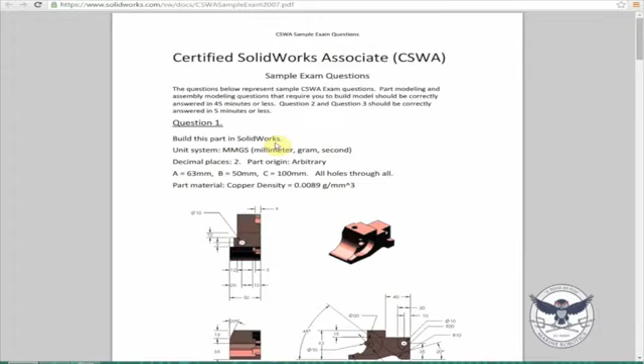So there's a bunch of example questions online you can find. These are directly from SolidWorks on the exam. Some of them are older, some of them are newer. It's basically the same thing as the easier ones - they're just more complicated parts and going to take longer to do things.

So I'm going to start out with something simple like this. It's just a basic - I don't even know what this is. It looks like a cam for like a linear bearing maybe.

The big thing to notice with this is first they give you these dimensions: A equals 50, B equals 70. And there's a huge part to this to make sure you pass the test.

So the first thing I would do is go into Tools, and there's this thing called Equations. This is very important in SolidWorks. You can set up global variables. Any sketch that you make has a value.

It'll save in here. You have to change the view, but it'll list under dimensions here. So you can make variables as equations.

So now if you wanted like A over 10, you could set this variable equal to A divided by 10, and that's equal to 1. So anytime I change 10 to 20, this will update as well. So it's a useful thing in SolidWorks.

So first thing I'm going to do is set B equal to whatever it was. What was it? 70 and 50.

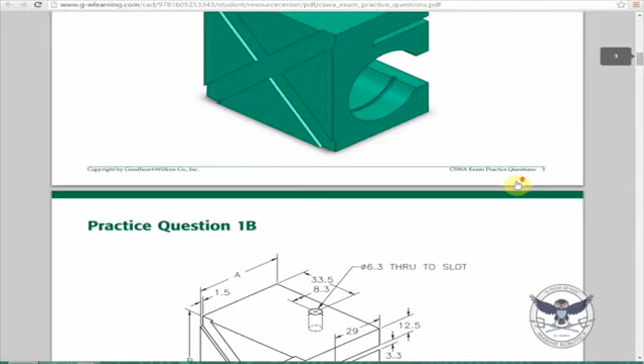Another thing with SolidWorks is you want to be strategic with your models. You have to have a good idea of what you're going to draw before you just go and draw it. Often I see people start with like this face, or somewhere that wasn't methodically thought out from the beginning. What I would do is start on this face and extrude this whole piece outward like this. So that's what we're going to do.

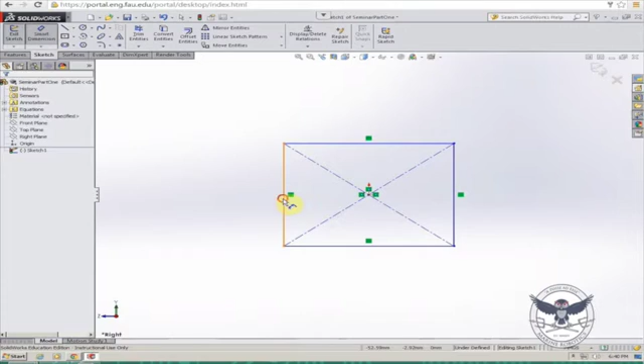So the dimensions of this is A and B. Here it doesn't matter which plane you do. Also, I like to use the center point like this, it's just a personal preference. So if you click the rectangle box, you can get that option to get the center thing. So now this dimension is A, so I can say equal to A, and there's A. You get this little equation looking thing, sum, and then this is B.

So now if I go up here and I change A to 20, that'll change automatically.

So this is 67 millimeters total. So I'm going to extrude this. Again, I like to do mid-plane so it evenly spreads the whole thing across it. So this is 67 millimeters. Now the reason I can also set this equal to A, or I could say A times 2, see how you get the little equation thing? But they didn't give me a dimension as a variable here, so I'm just going to say 67.

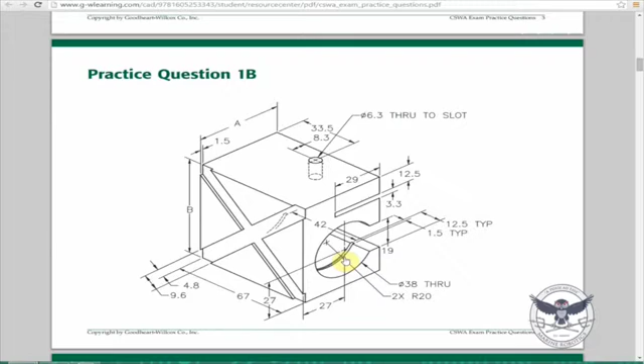Okay, so what's the diameter of this circle? 38? Right? Yeah, okay. And then it's 27 and 27 millimeters from one corner. It almost looks like it's in the center, but it's not.

So a nice quick key is Control 8. When you start a sketch and you do Control 8, it'll automatically go normal to it. A lot of professors will teach you to right click and do this, but in my opinion it's a little slow.

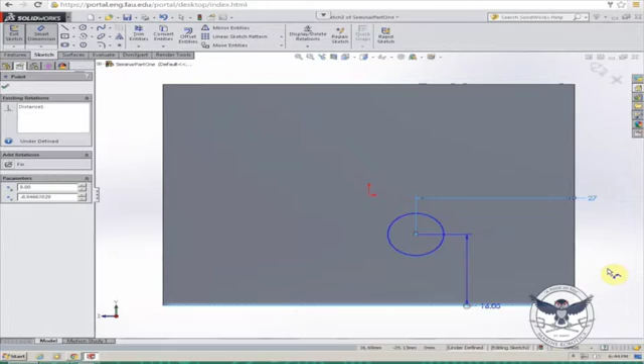Alright, so circle, 27 millimeters. It's 38, right? Yep.

So now we can just extrude cut that through the whole thing. So now we have a break through this whole thing that's 19 in total.

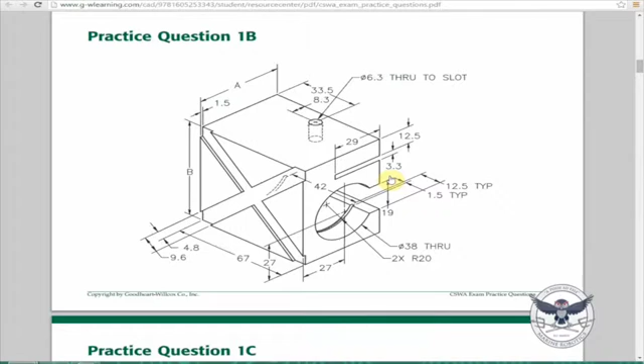So on your model, it looks like on the inside of that cut, is the whole thing already like how it's all shiny and beautiful? Yeah, how do you get that to happen? So that's just by default this little RealView graphics, I think. I don't really like it personally, it just takes up more GPU power to render it, basically on the virtual machine. Once we finish it, we can go and render it, make it look really nice. But for now, it's not that useful in my opinion.

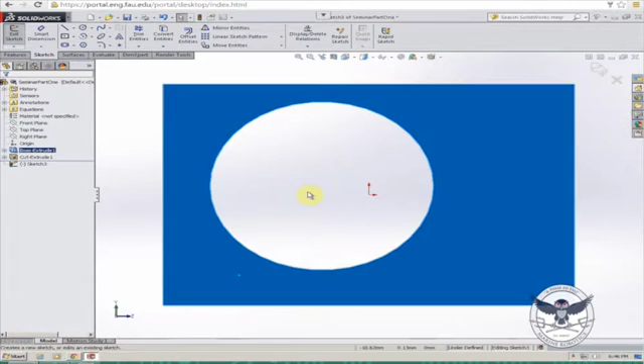So now I'm going to cut out this piece here. It's directly in the center of this piece, so we can just draw a rectangle. Actually, I want a different rectangle. This is 19 millimeters.

Does everyone understand the concept of the fully defined sketch? Yeah? You want to go over it? Okay, so a fully defined sketch means that it's all black, basically. You can also see down here it says fully defined. And what they mean by that is everything in the sketch is stuck to something in relation to. So SolidWorks is a parametric program, meaning it has parameters for everything. So what I can do is relate this point to this line in these different ways. So I can say I want this to be at the midpoint of this line, or I can just say coincident. And Pierce is a little different, that's more like 3D view, but it would do the same thing as coincident here.

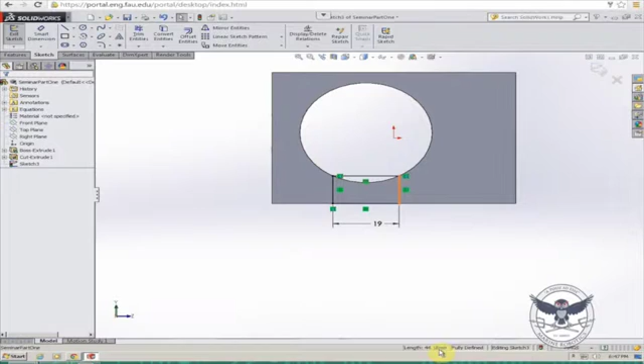So basically you just want your whole sketch to be black like this and say fully defined at the end. And you want to make sure you relate it to things that are important in the sketch later, because if you move or if you change the size of the circle later, you want this thing to change with it. This is the point of that.

So what I did is I made these, this is a square, so by making these coincident with the circle here, it centers it on this circle as it should. So if I move this circle up or down or left or right, this extrusion will come with it. So I'll extrude cut that and through all.

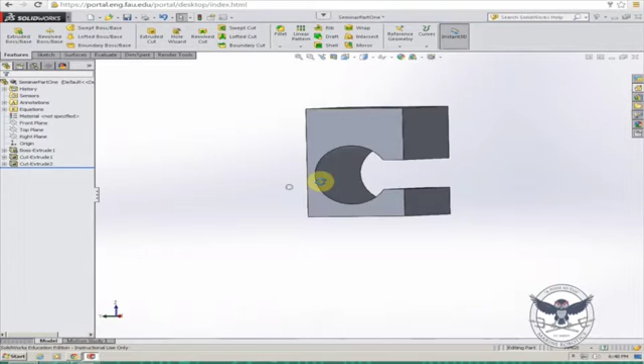Alright, what's next? So let's cut this piece here. Do you think you want to put that extrude cut on the correct side of the part? Is that not on the right side of the part? It's not. No, it should be on the thin side, because that's the side that was dimensioned to 27, and it's on the opposite side of that. Let's check that.

Oh yeah, okay, so check this out. So Harold brought up a good point. But since this is parametric, I don't have to delete everything, you just change the relations. So now instead this is 27.

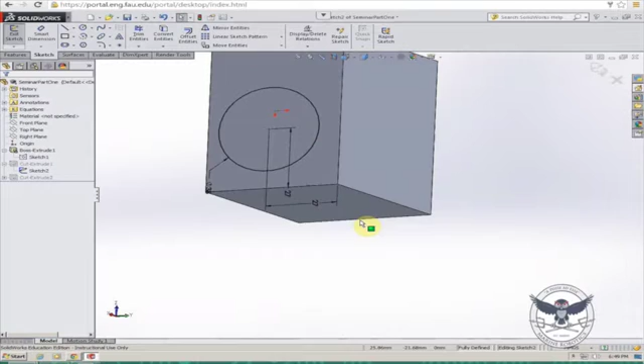Exit the sketch and everything will go with it. So you can see here this rectangle is still coincident with the circle.

Alright, so now we're going to do this piece, which is 3.3 by 29.

I think it was 12.5 away. Yep. And then you can see here it goes all the way through the model. That's what they call a hidden line, so you can't really see it from this view, but you can see that there's something behind there.

Also, when you're in a sketch and you're done with it, it's all fully defined. You don't actually have to exit the sketch. You can just go over to the Features tab, press Extrude Cut, and it knows what you want to extrude cut now because you were currently in the sketch.

And we want to go through all again. Also, you have these options for extrusion. You can go through all. Through all both means it goes in both directions, not just one. You can go to next, which is the same thing we're doing here—it will just go until it comes to something new.

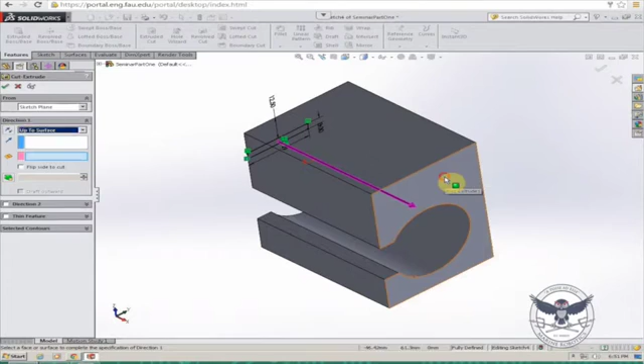We have up to surface, which would allow you to extrude up to a certain surface. And if you had a 3D surface, you could have it curve around that surface. Up to body is the same thing as surface, but a body. But we're just going to do through all.

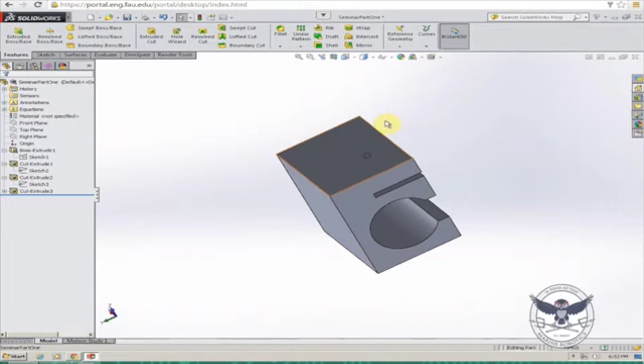So next I think I want to do this hole here, and this is 6.3 in diameter. So we make a sketch on the top. I like to just draw it somewhere, nowhere really specific, just kind of out of the way, and use my dimensions to define it to a certain point.

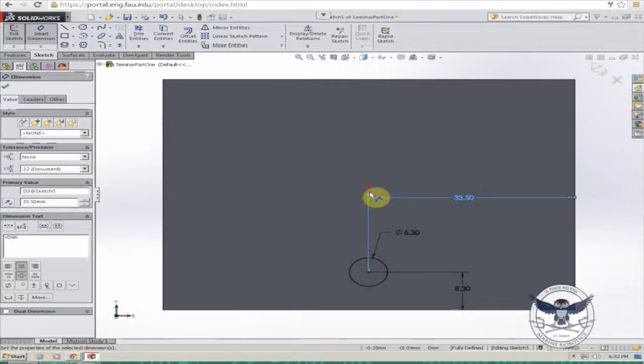Now that looks like it's in the center as well. In any other case, I might say that that was the center, but since this is the SolidWorks exam, I would just use the dimensions that they give you and not try to recreate and do it a better way.

So now that's fully defined, we can extrude cut that. And here we can use our up to surface. You can also use up to next—yeah, I think I like that better actually. It should just go to the next surface.

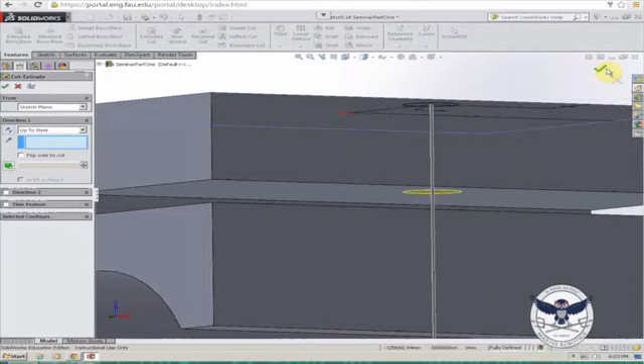So now we're almost done. We just have these internal gasket-looking things, and then this retention ring slots, these slots on the outside.

So let's do the slots on the outside first. I'm going to make a sketch on the outside, just going to draw a bunch of stuff here that generally looks like what I'm going for.

Alright, now we know these here are parallel, so we can select those two and set a parallel relation. We'll do that for all of them. Whoops, not equal. And then these here are collinear.

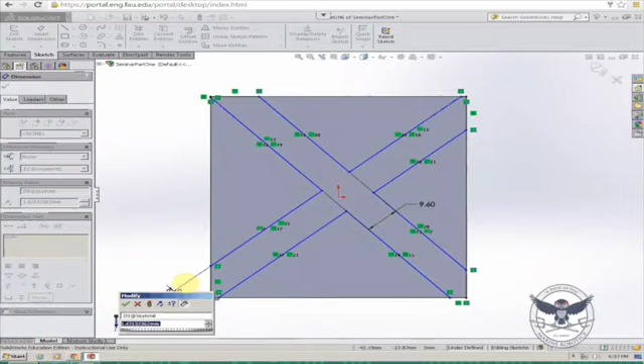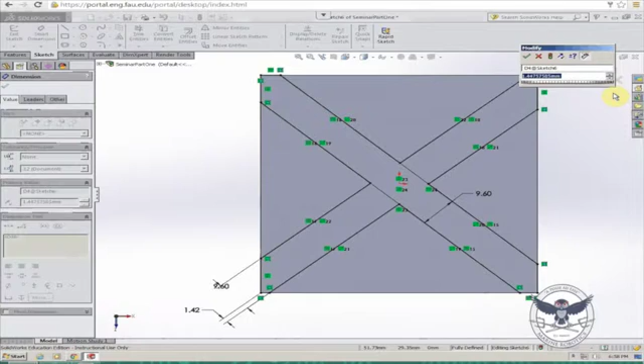You know what? I got a better idea. Why not just make an X and then offset it? Yeah, that's what I was thinking.

Would you just do that for construction? Okay, so any of these lines, you can just set for construction, and now it's a construction line. So when you extrude it or do any features with it, it'll ignore it—it's just for construction. But you can apply relations and stuff to it at the same time.

Can I do, yeah, okay, bidirectional. So I did an offset here of 4.8, which I think is right. Yeah, 4.8. And then I set bidirectional, so it's going in both directions.

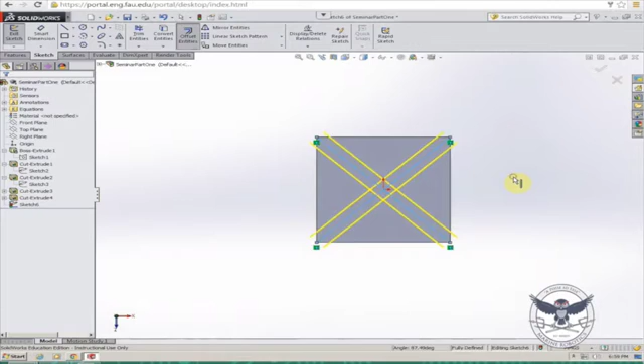What I'll do is go to convert entities, and that'll take all the lines on that face and make it a line on your sketch. So now I can use that to trim these away.

If I get the trim tool - there's a bunch of different ways of using it. You have power trim, which is what I usually use. The rest of them, I doubt you'll find a reason to use, but they could be faster in some situations.

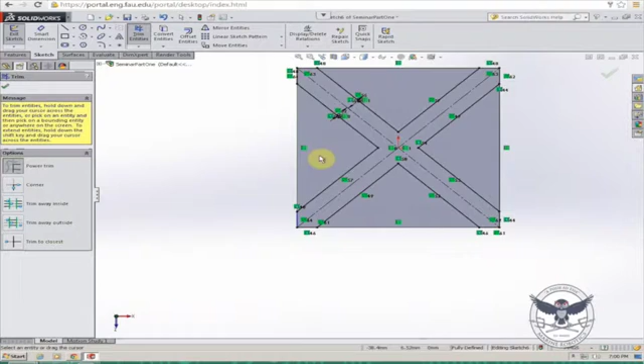So with trim, you just hover over it and draw a line over it. SolidWorks will do its best to figure out how to redo the relations. Sometimes you have to re-relate things, but here I don't think I have to. There we go.

So now we're going to extrude this 1.5 millimeters in. That's that shape.

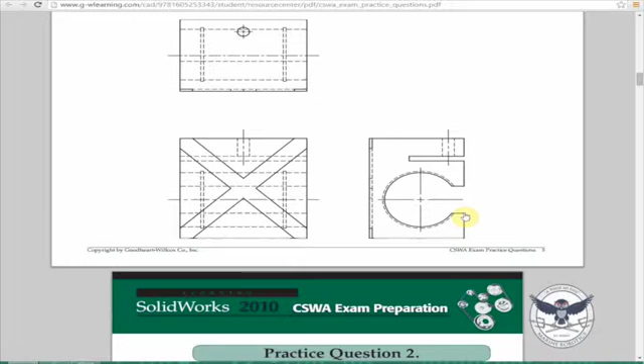Let me see, maybe I'm going to make an axis along here, and then I'm going to make a plane. You already did that - how do you do that? Do the axis? Yeah, so...

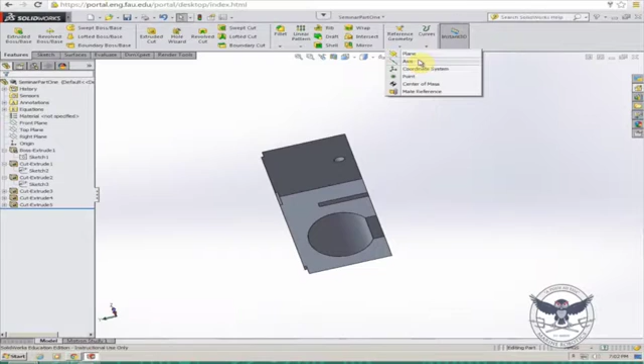Under reference geometry, you have a bunch of things. I usually use plane and axis, but if you go to axes, you can make an axis along a bunch of different things. So say you wanted an axis across here, you would select these two points and it would make a line like that. But since we selected this surface here, it knew where it wanted it - it was like a radius or diameter, I don't know how it does it, but see, it selected cylindrical conical face.

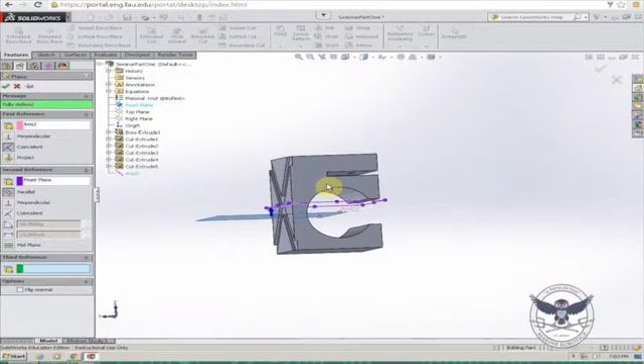And now we can use this axis to make a plane. So you select the plane in here. We don't have to do much else, but I'm going to define it - oops. Yeah, see, I want it parallel to this face, so I selected the axes and I wanted it coincident with that axis, so it's touching the axes. And then I want it to be parallel with the front plane. So now I have a plane intersecting that circle.

Now I can use this to make a sketch on, but first I'm going to do a section view - not on the front plane, but on this plane. That way I can see what I'm doing. I'm going to make a sketch on it.

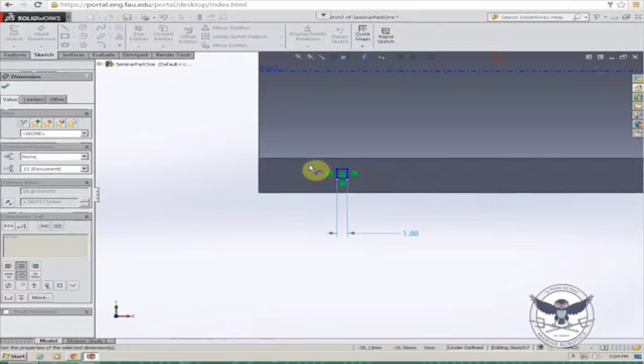I'm going to draw a little rectangle here, and it is 1.5 millimeters. And from this center axis, it was 20 millimeters, which was the depth, right? Yeah. And then it is...

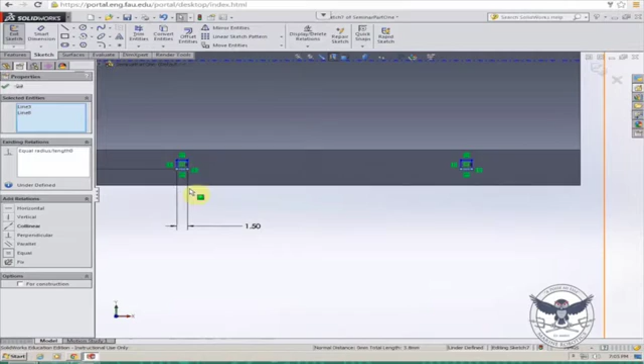I'm going to make another one, and here what I can do is I can set these equal - whoops. Instead of redimensioning this one, I've already dimensioned this and it's the same dimension, so just set it equal. And I want these to be horizontal, and I'll make this coincident as well. Actually, I'm going to make it coincident with this edge.

If you have a relation you don't want, you can just select it - that's what these little green boxes are - and just press delete on your keyboard.

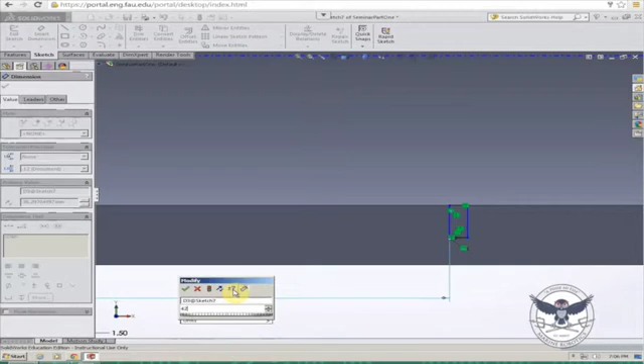And then the dimension between these two is 42 millimeters. I think so, yeah, yeah it is. Let's take a point to it and then - and then it's 12.5 from that same edge to the outside edge. It looks to me like it's in the center. Yeah, but if you're taking a test, I would just use the dimensions they give you.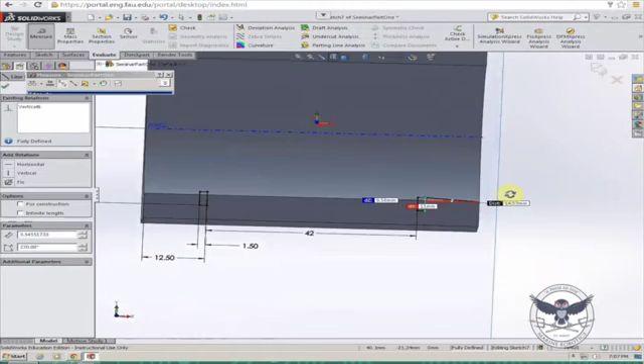And I think if we measured - no, it's not. I don't think it'll affect the answer, but you don't want to get it wrong. Okay, now that we have that, we can exit this sketch.

We'll go into features and we'll do a revolve cut. The axis of revolution is this axis we just made. You can press OK, and it just cut that all the way through. We'll turn off the section view, and that's it.

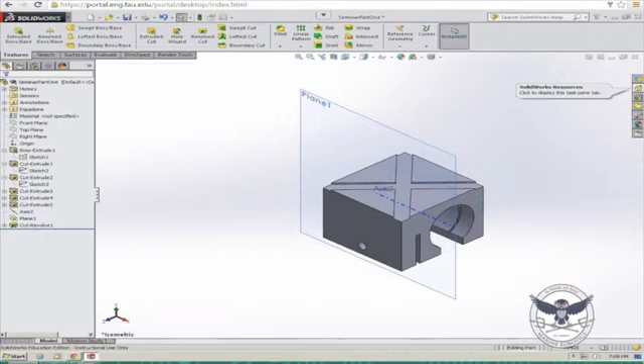So we could also put some materials on here for some colors. I kind of hate the gray that they always do - maybe a blue would be good.

One thing we have to do is set the material, since they told us it's AISI 1020. To set the material of your object, you right click on it in the hierarchy, the top tree piece here, right click, go to material, edit material.

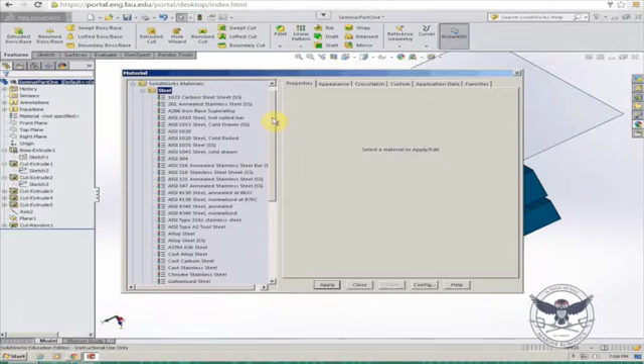And it's this here, so we'll go apply. It actually changed the color on me. I'm going to hide this plane, I don't need it anymore.

That's the whole thing. So now what they're going to ask you is, what is the overall mass of the part in grams? Let's find out. If we go to mass properties, it says 1127. There we go, so the answer is D.

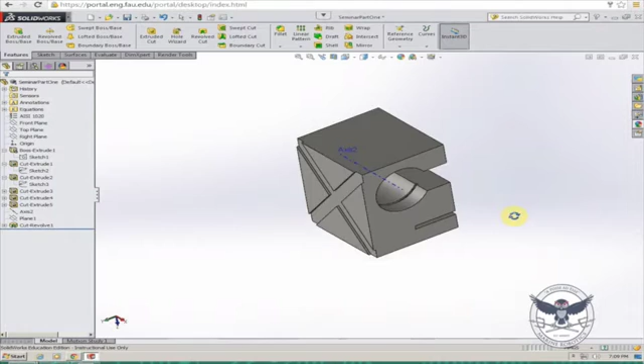We can go back into mass properties and find what the new mass is. That makes question 2 a lot easier - all you have to do is change those dimensions and find the mass. If you didn't do that, you would have had to go back into your sketch, find where you made those dimensions, reset them, and hope that everything else was related correctly.

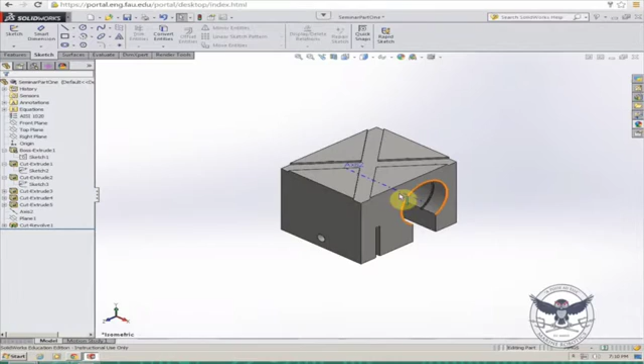Oh yeah, beautiful, okay. Can you hide the axis? We'll be here for a while. Yeah, let me hide the axis. Now it looks perfect, so the render, thank you.

So the rendering tools aren't enabled by default here, so we have to go into the add-ins, tools, scroll down to the bottom, add-ins, and here we want to set PhotoView 360 to active. Since I'm on the server here on the VMware, if I set startup it won't save by default. But if this was on your computer and you wanted PhotoView 360 to come up every time you open SolidWorks, you would check that box.

So now we can add a background. Let's do this urban thing. And do a preview window.

Always takes forever. What was the last, was it preview window, what was it? Oh, it's on, you might not have the tab. Right click on one of the, do you have the render tab? Yeah. You don't have preview window there? Oh, yeah, there you go.

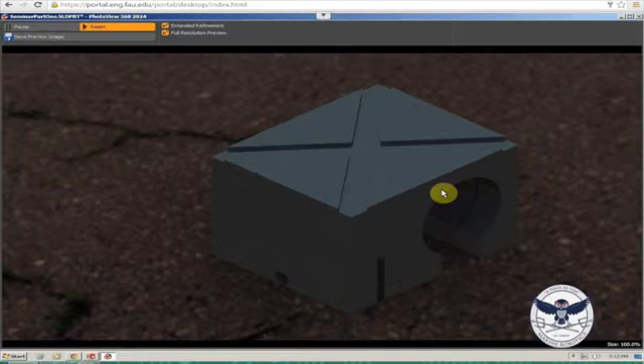Why are you here? I didn't know how to do the equation.

Stuff like... you want to try this one? Yeah, yeah, okay.

What's the website so we can actually open this up as well? Oh, this practice thing? Yeah. So if you just Google, like SolidWorks Certified Associate Practice Exam.

It's like these 3 PDFs. But I can email this to you if you want or something. There's also a bunch of stuff on GrabCAD from people who have done this before, taken the test.

All kinds of tutorials in here. So this is my SolidWorks, my GrabCAD page. We got a little Lego spaceship, yeah.

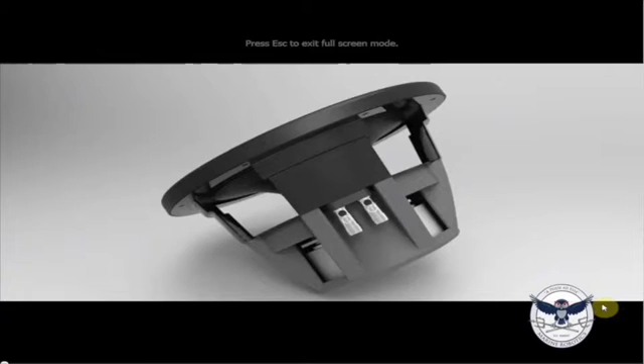And I actually did a full HD rendering. Yeah, how long did that take? It took my computer like 10 hours. I went to work, started it before I left, and by the time I got back it wasn't done, it was still working on it. For that 10 seconds that took like 10 hours, and it's just 10 seconds long too. That's pretty awesome. You got it so smooth on the other end.

Yeah, well that's the material you see. Oh okay, figure that out. What, the rendering? You got the material because it doesn't show like plastic.

Yeah, so I didn't use SolidWorks to render that actually, I used a program called KeyShot, which is way better in my opinion, and it's way easier to use too. It's a lot simpler, and there's a little add-in for SolidWorks where you just press a button and it'll automatically open it in KeyShot. But yeah, all of these images are computer generated. That's not real.

And then I also drew my television, this took a while, a week at home. This is Inventor, Autodesk Inventor.

I highly recommend anyone who's looking to get a job in mechanical stuff to have a GrabCAD and put stuff up there. If you put a link on your resume and they click on it and see stuff like this, it's really beneficial. And then they've got this whole badge thing too - I got this active uploader badge, but there's many other badges, like if you win a challenge, they have challenges on here too.

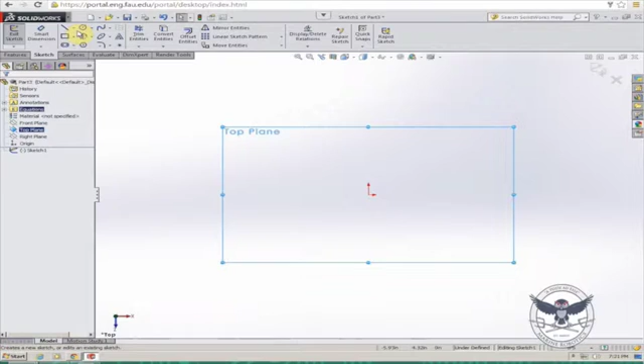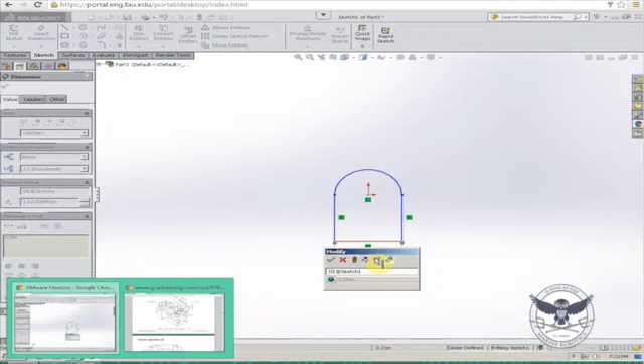So this time I'm going to do it on the top plane, and just draw a rectangle in here, and then I'm going to do a circle or an arc, and relate these points together. I'm going to delete this top line because I don't need it, and make this center point the origin. This was B I think, yeah. And this was equal to A. And that's not good - just make that one equal to B divided by 2.

What's not? You just made a tangent though. That way - oh yeah, I could have done that too. Let's do that actually.

And that gets extruded by... I can't tell, they always make these so hard to read too. It says wall and rib thickness 0.25 at the bottom there - what that means. The other one looks like it's half an inch. I was thinking maybe this, but I think they're talking about this pocket. Yeah it says there's wall and rib - yeah it must be 0.25.

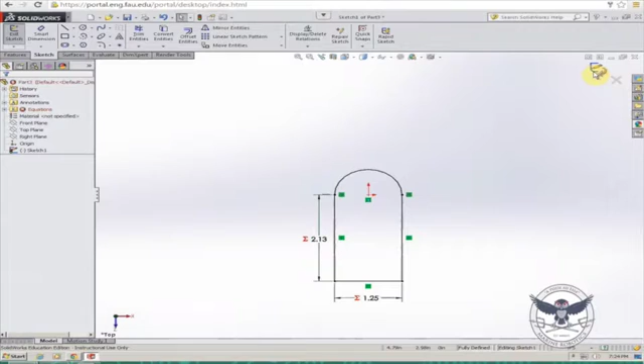It's going to come out lost, bro - you got lost? Yeah, where are you at? I'll still draw a rectangle. Okay, Harold, can you help Wesley? Oh sure, okay, you already asked me. Oh, I got a bad equation.

Did you set A and B? Yeah, the A and B are the same. Okay, so go to the drop down, or... and it's like a good one.

There. Okay, so don't, yeah, drop it. Run.

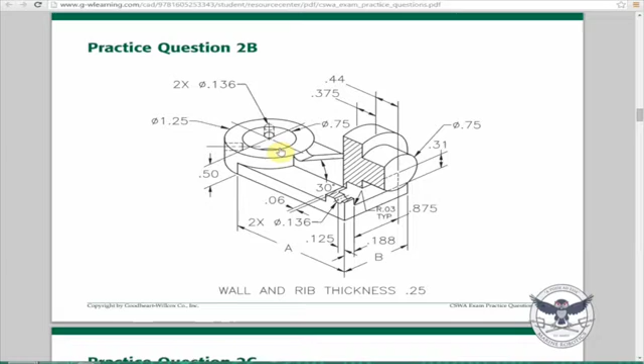So I'm going to draw this circle at the top next. No, draw that, close quicker.

Yep, one. Can you click this one? And yeah, it draws it backwards. Did you click that one? Yeah, I did. Is that what this is? That's what it is.

Do you want to get an actual mouse so you don't have to just click 50 million times?

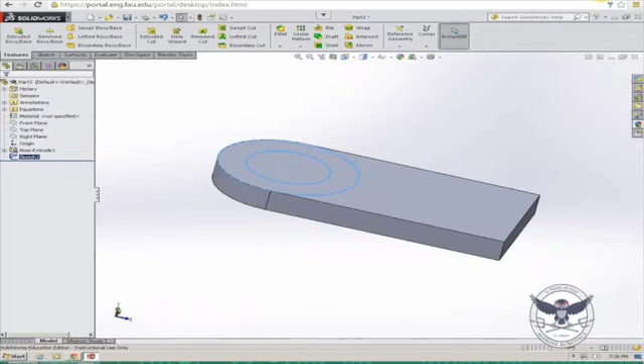Sweet. That's what it— you don't have to. What was the thickness again? 0.25. Oh, there you go.

I'm going to do these little cutouts here. Get a mouse.

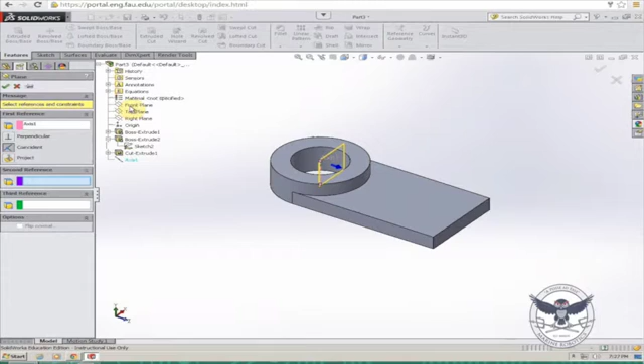And what I think I'll do is make another axis, and I'll use that to make a plane that is at 30 degrees of this.

Well, they make it so you don't use pencils, just don't use them.

Before Harold has a heart attack. This one doesn't work? It works. Okay, use that one. Where's the receiver? It's in there. Oh, so it's right here. It's inside of it. It's hidden.

Out of curiosity, how long did it take you to get to this level of mastery? It's just... so I actually did an Associates of Science in Computer Aided Drafting and Design back in Tampa, which was all AutoCAD. There was a class in Inventor, but that's it. It was like 2, probably 3 years of messing around and interest in this. In high school, I got interested in Photoshop and Illustrator, and then I found out there were 3D programs that were way better, you know, third dimension. So I started playing with those, which got me into CAD, and I've always just been doing that. Yeah, it's about 3 years probably.

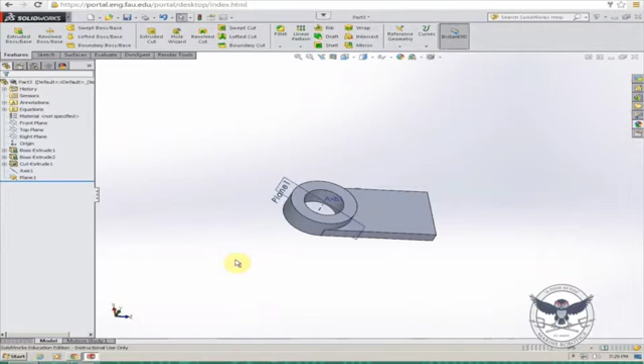Shift, click origin, in SolidWorks. Extrude that 0.25.

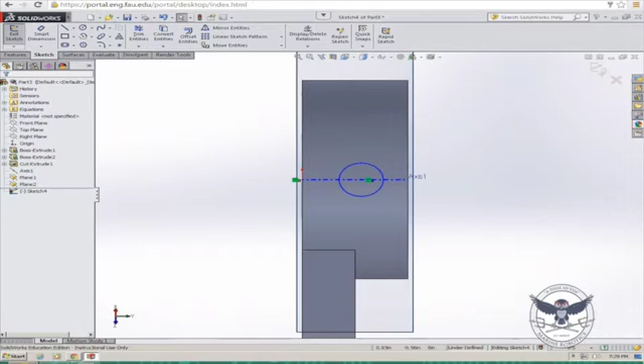Nope, oh it's not. Yes, this right here, that, and that, one. Both of these. And the same thing. Look, it's the last one.

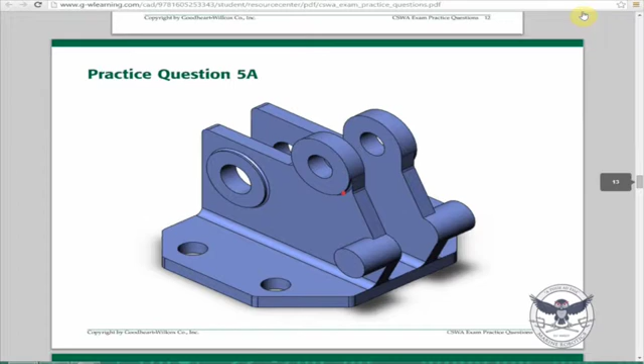How much time do they give you for each question on the test? Or how much— okay, do they give you one question, one time? So it's 3 hours in total. I don't know exactly how many questions there are, but I think there's like 3, just like what we did here. And that's for the associate? Yeah, it's for the associate. And it covers all this stuff, you know, sketching. I think they get into a little bit of assemblies or mates. Or I don't think so actually. That's the professional one, then you've got to cover all this stuff—collision detection and assemblies. And then you get expert, and it goes on.

When you mentioned finding the plane, how did you do that again? How I did the what? The plane, for the last one I just did. How you did the plane, so it won't be part of any of the existing ones. Wait, what? How do you define the plane?

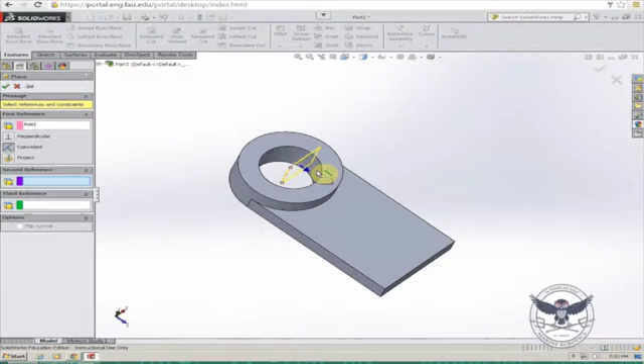Okay, so you can define a plane just like everything else. You can go select a plane. So you know how to get to the plane part, right? The reference geometry window, then plane. And you have references, so you reference it. SolidWorks wants to know where you want a plane, so you say the first reference is this thing. I could say it's perpendicular to that, meaning it's on this plane instead of parallel with it, or I could say coincident with it. In this case, I want it coincident. My second reference is the plane that runs straight through here, which is this one, the right plane.

So now I want it to be 45 degrees from this one plane. Here what I'm saying is my first reference is this axis that runs through here, and I want it to be coincident with that, so it's in the same line. You could say perpendicular, but we don't want that. My second reference is the right plane, which is this plane that runs straight through here, and I want it to be 45 degrees off from there. So I could say 90 or wherever, or I could use any of these other ones. In class, I don't know if you remember, our professor was trying to make a plane between two faces, and there's a way easier way to do that.

Hey Paul, which one was the B measure? Was that the B? Yeah?

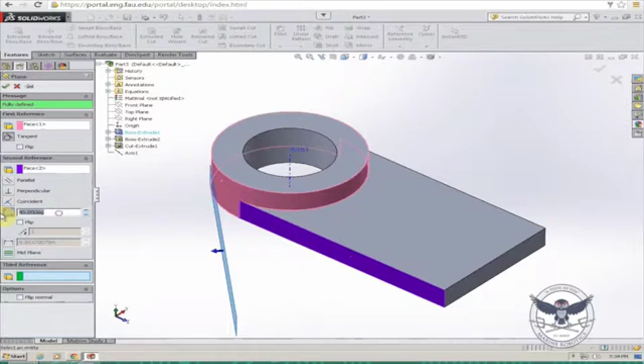We have, if you wanted to do like a tangent to the circle here. Yeah, you can do that. Go plane, and then you need a second reference because it could be anywhere around here. So you can say I want a plane to be tangent to this, but 30 degrees from here. So now it's both tangent with the circle and 30 degrees with the face. And you can get more complicated, but this would give me an error actually. You could give it a third reference too.

And then here I'm offsetting. So I want a plane that's offset 1 inch from this plane.

What's the diameter of that hole? 1.25, I think. No, 0.75. Sorry.

So now I need to cut a little hole in here. And try to use relations as much as possible rather than dimensions.

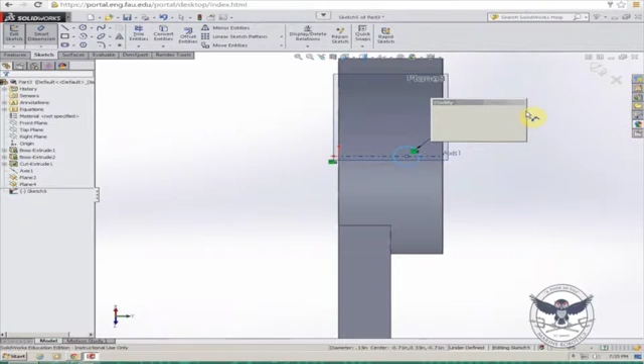What angle is those circles in that base supposed to be? Like your plane was at what angle with respect to the center? It's 45. So 45? Yeah, or from the center, 90 apart from each other. Yeah, that's a good question. Yeah, 45.

And it's 0.19 from the top face here.

Now it's fully defined. I can go extrude cut in the other direction, up to next. Now I'll cut that out.

This is one thing I love about SolidWorks. I can actually mirror this feature I just made. So instead of doing that over again, I can say I want to mirror that feature I just made about this line.

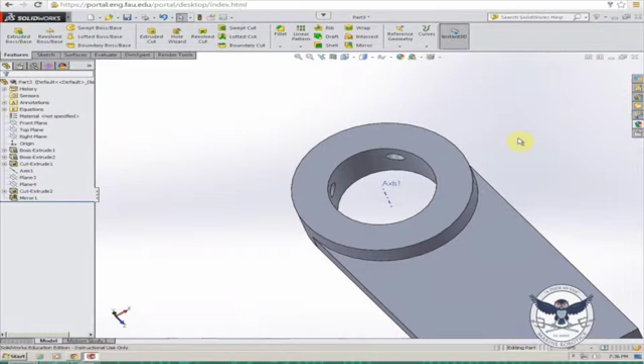Now I got another one. That surface. Now we need...

So to make this the other hole in the center, you just mirrored it? Yep. You can just go...

What was the angle offset from, or what's the angle of that hole? 45. 45?

So you select the right plane, or in my case it's the right plane. So you mirror the cut? The feature, yeah. Oh, okay.

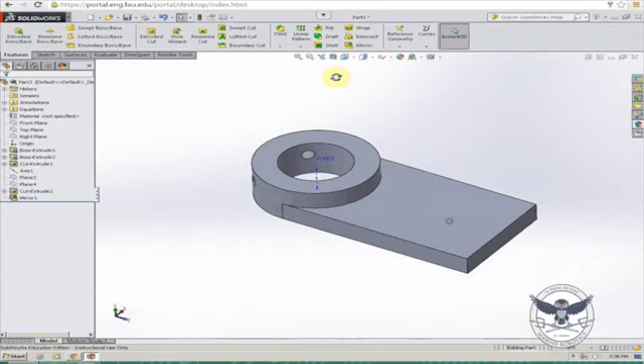So I'm telling SolidWorks to do the same exact thing on the opposite side across. And so there's a mirror feature? Yeah, you can go up here and mirror. That's really useful, I use that a lot.

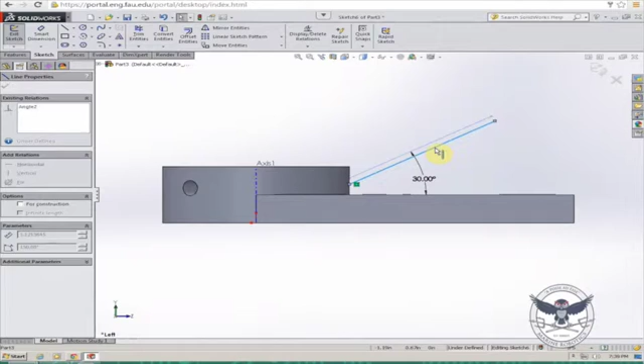Colin, how do you click on Normal To? What? Normal To option? There's no Normal To option. Oh, there it is now. Now it's there. Control 8. Yeah, we're doing that. It wasn't doing anything on this keyboard.

Oh, Control 8. This is pretty cool. No? Oh. 0.375. No, just 8. It's just, it's slow sometimes.

It makes it Normal To view. That's exactly what it says it does.

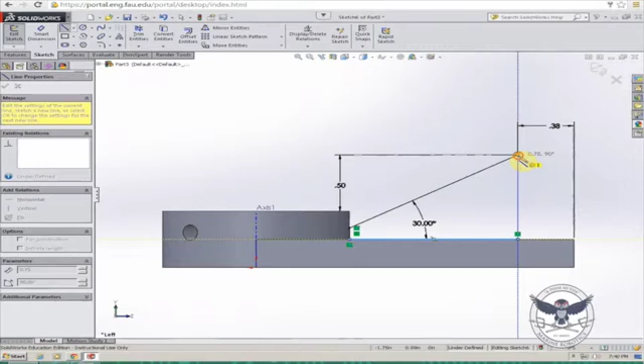So this could be an issue here. When I extrude this thing out, I'm gonna get a zero radius error right in the center here. I think, let me see. Yeah, zero thickness geometry, because there's zero thickness right here.

So a way around that is... yeah, it says that. You can just merge these two points together, make this horizontal.

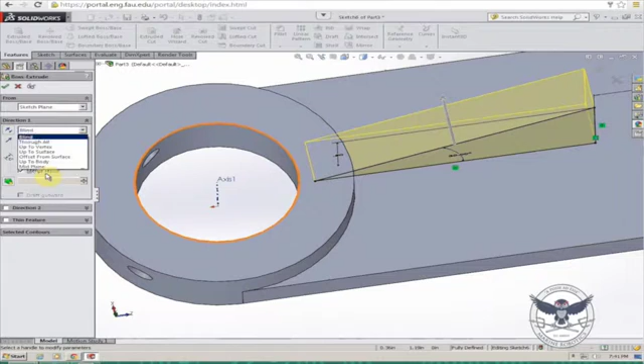Why can't I convert these entities? I don't know. This version... and then there's a fillet here, of 0.1. Yeah, it's... there we go.

It's not converted. Oh, why aren't these entities converted? I'm trying to get this line related to that. It's not letting me select these lines at all.

You trying to convert it? Yeah. Why? Well, I was trying to convert this square because it wouldn't let me select this to make that relation. It won't give me the coincident relation.

Does it pass through there? It's the same way you did it - what were you trying to draw? I was trying to go out sort of. I wasn't sure how you did it, so I was just doing it this way. By the time we got to that, he was still doing the circle.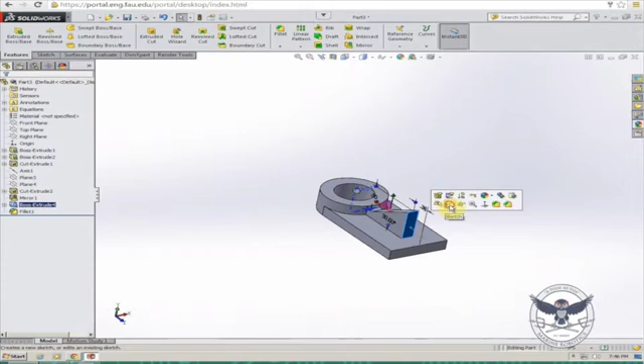Now this is coming together now. I'm gonna sketch here. I'm gonna do that. So you want to do that?

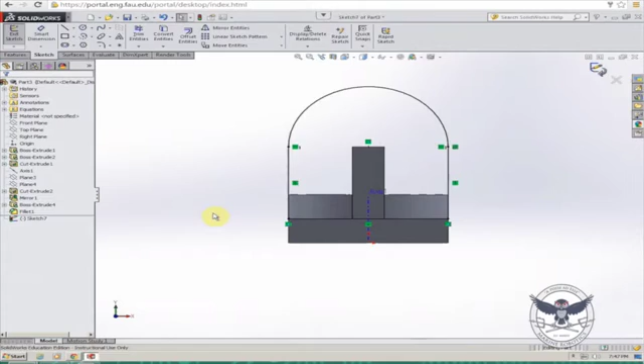I don't have any of these dimensions. Is there a link to that drawing that I can just look at easily so I don't have to keep waiting for you to go back to it? Yeah, hold up.

I like it. So it's this big thing here. Hold on. I'm just trying to get this to respond to stuff I'm clicking on.

Yeah, these relations are your friend. You're gonna get to know the relations.

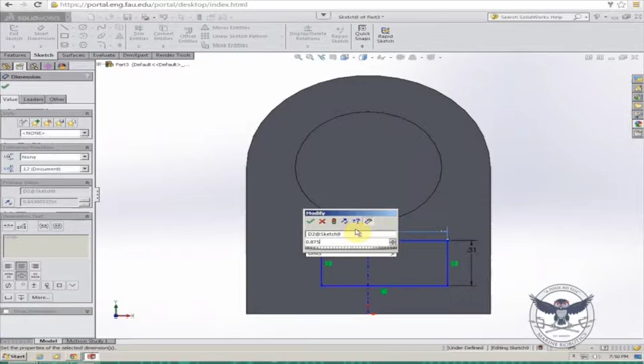Does it tell you the thickness of the fin? Yeah, it's 0.25, just like the rest of it. Okay.

How did you fix the rebuild error from the fin? Oh, so what I did was I went in farther. See if I can find it. Here it is - yeah, I let these come all the way down inside this piece, so that it wasn't zero there. Yeah.

So I guess that just happens a lot when you have any circles and everything's touching - you have to work around them, yeah.

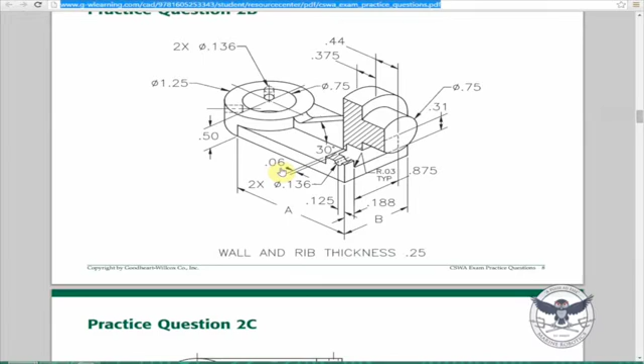So this is interesting - this is, you extrude cut this to 0.06 from that edge. Offset from surface, 0.06.

And then fillet everything in there. What? It's a weird part. Yeah, I know.

Alright, and it's alloy steel.

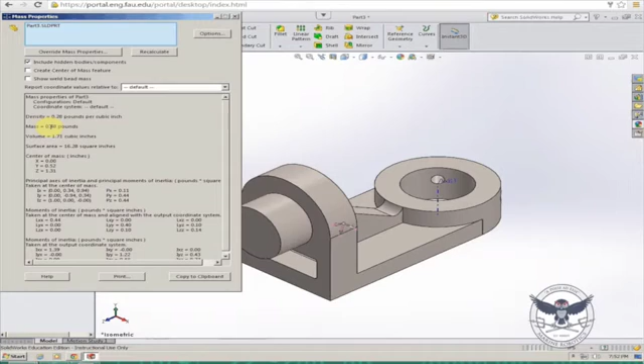0.48 pounds. Oh, pretty close - you know why? Because you didn't finish it. What did I miss? That little hole in the side. Oh yeah. Probably would have passed anyways, though. Yeah.

That's a nice thing, like they don't - 0.48 answer. Yeah, that's true. Yeah, it goes all the way through.

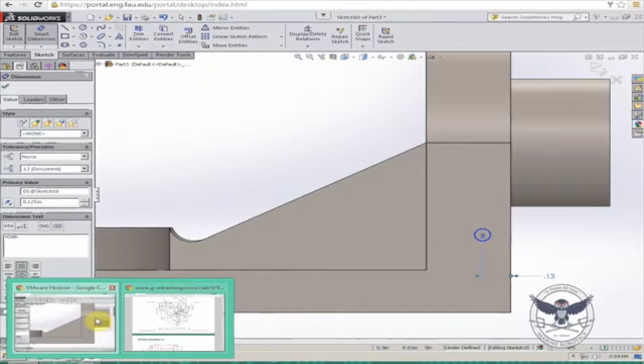You're gonna start over again. Yeah. You get to 98% and start over again.

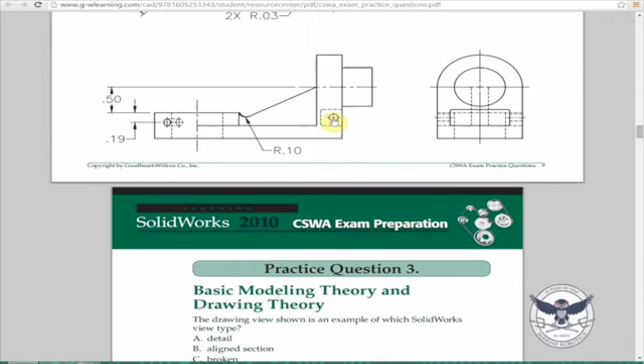Did anyone see where the vertical height of this thing is? What's this dimension? Or is it just in the center of this thing? I think it's just in the center, but - isn't it, if it wasn't, they would use a center line. See, there's no dimension here.

Oh, that's this pocket, yeah. Yeah, I think it's just in the center. That's from this edge over.